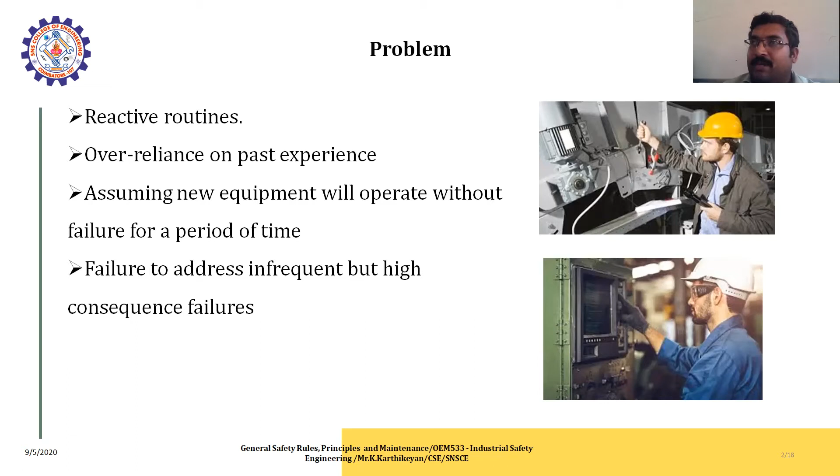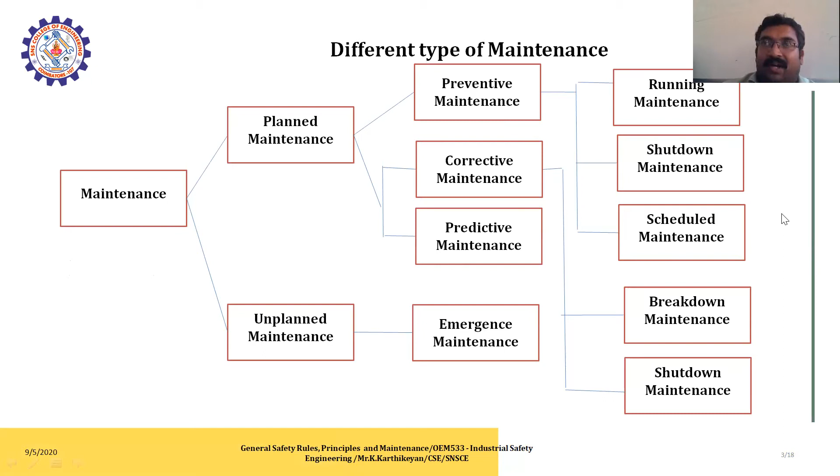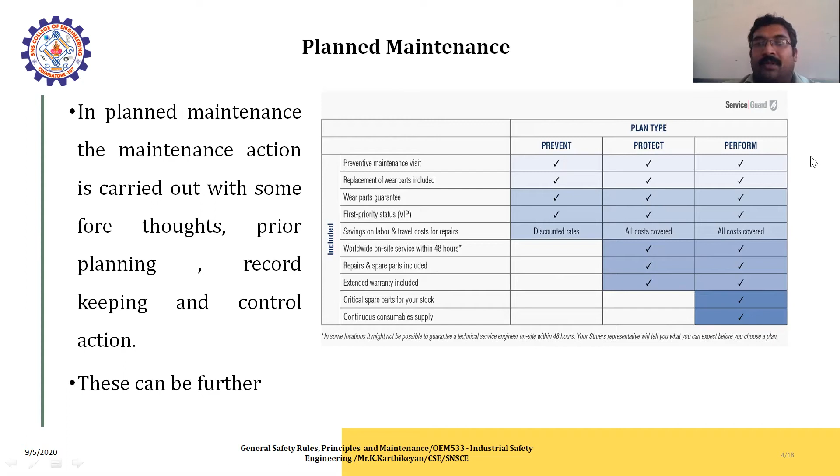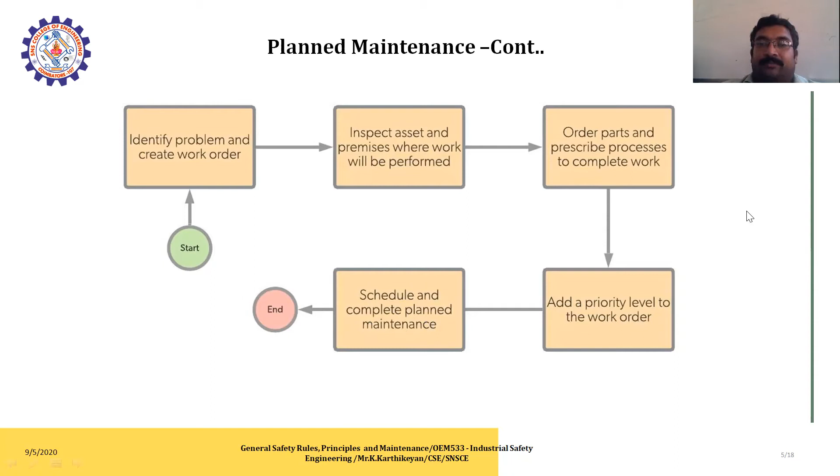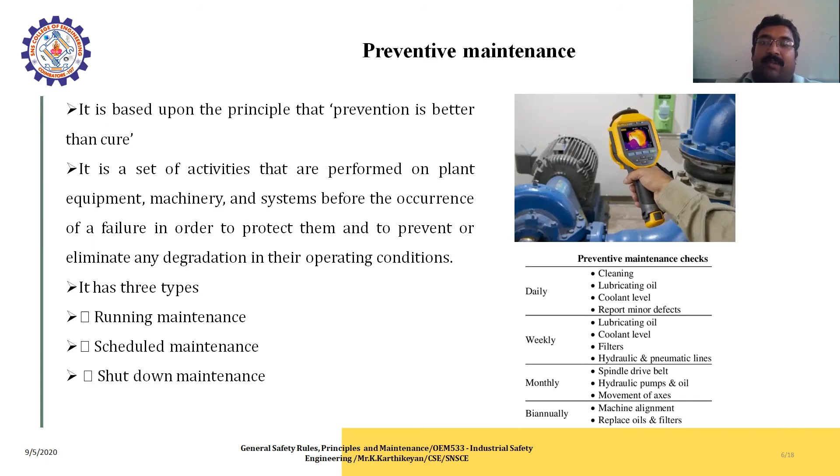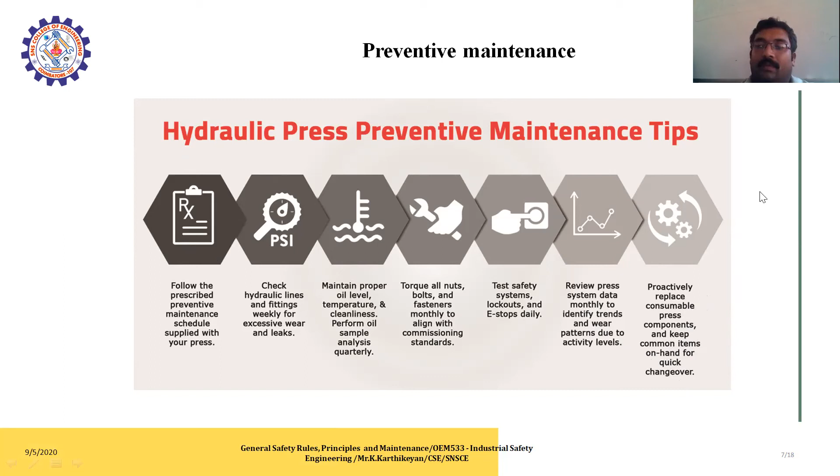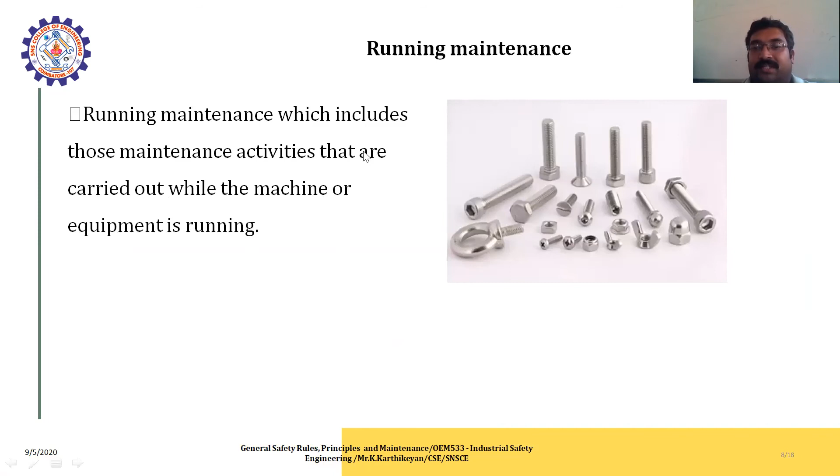Next, running maintenance. Running maintenance includes those maintenance activities that are carried out while the machines or equipment is running. This is a running machine in the system. So this is an example: I take ship machinery. So before I start the ship, I check each and every equipment in the process.

For example, lubrication oil is available, adjustment of nuts and screws, tightening of loose nuts and bolts. Each and every part I would monitor, and if any problem is created, the machinery area is identified, call the machinist, clarify doubts and modify equipment based on that product. This is the machinery sector.

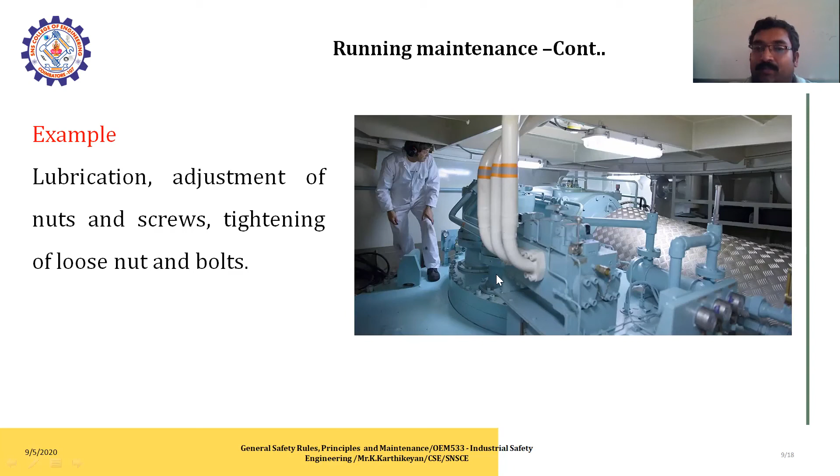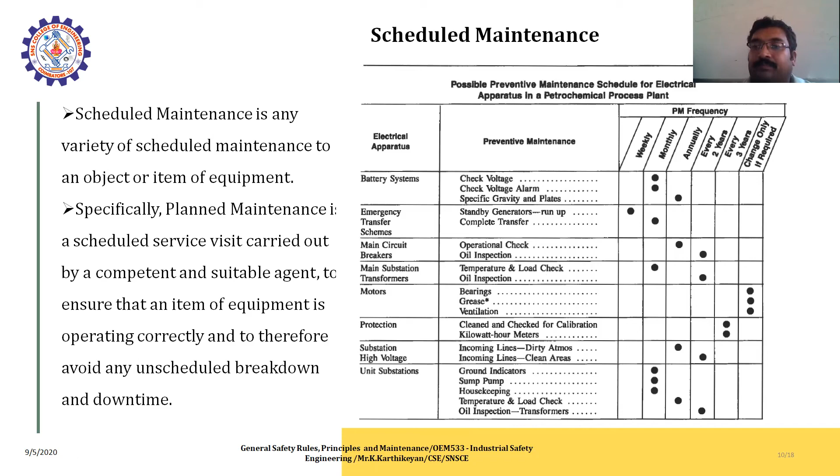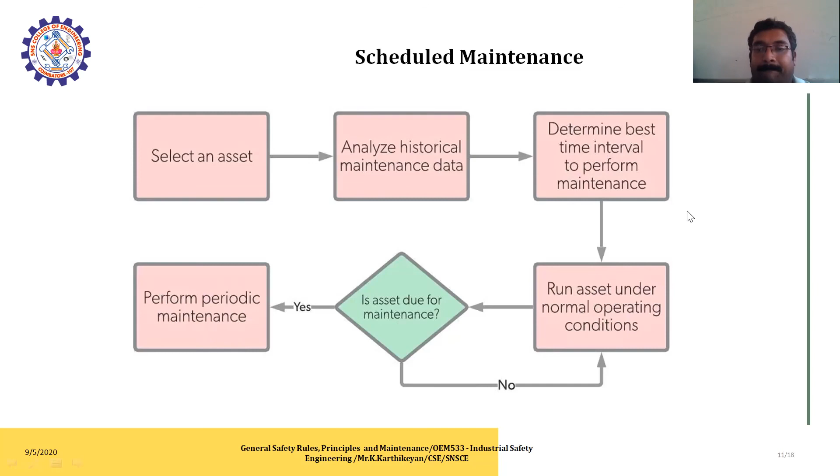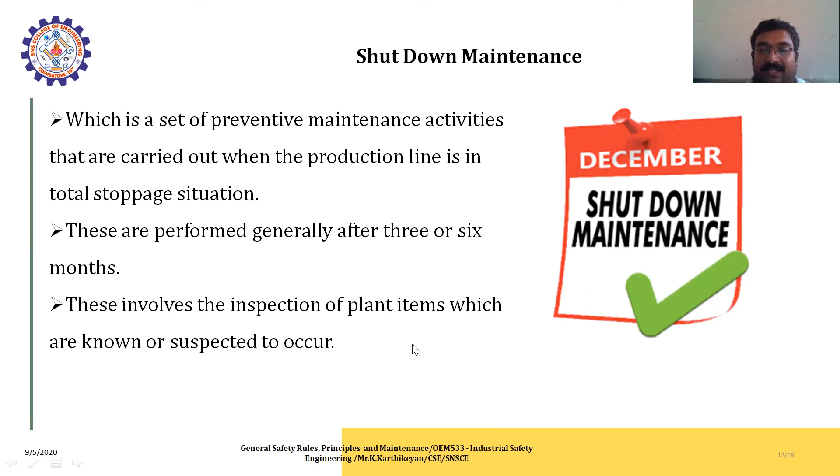This is shutdown maintenance, which is a set of preventive maintenance activities that are carried out when the production line is in a total stoppage situation. This is performed generally once every 3 or 6 months. This involves the inspection of plant items which are known or suspected to fail. This is shutdown maintenance. This is my activity: tell about one part of planned maintenance or scheduled maintenance, with step-by-step procedures.

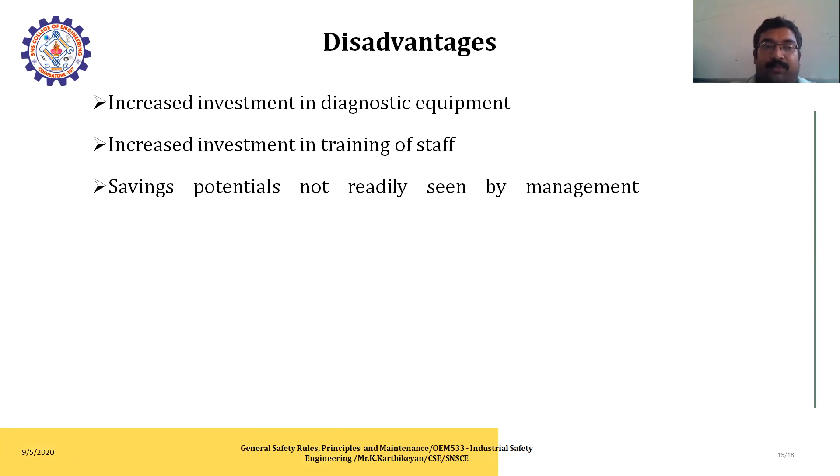These are the disadvantages. Increased investment in diagnostic equipment, increased investment in training of staff, and saving potential not readily seen by management. Increased investment in diagnostics means you check each and every equipment in your process. If not checked, your production line and production quantity are damaged. Increased investment in training of staff: a knowledgeable person needs no training, but a new person must be trained before being sent to your production line, so costs increase for training people. Saving potential is not readily seen by management.

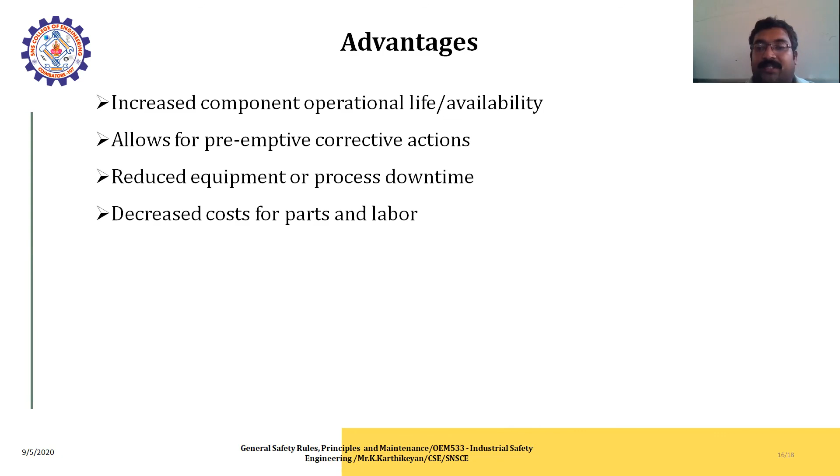These are the advantages. Increased component operational life and availability, allows for preemptive corrective actions, reduced equipment or process downtime, and decreased cost for parts and labor. These are the advantages. Next one, assessment: list the advantages of maintenance. Identify the disadvantages of maintenance.